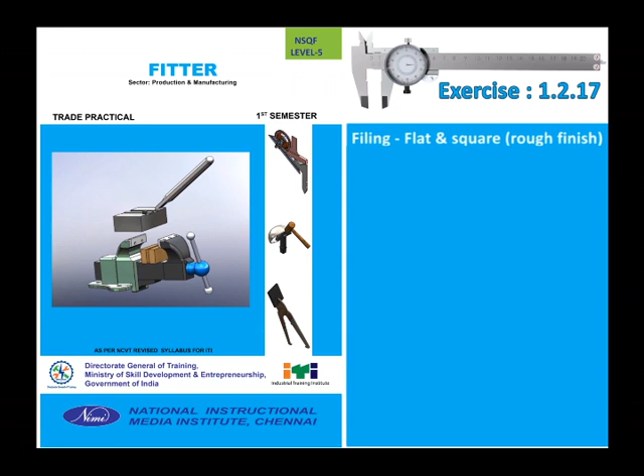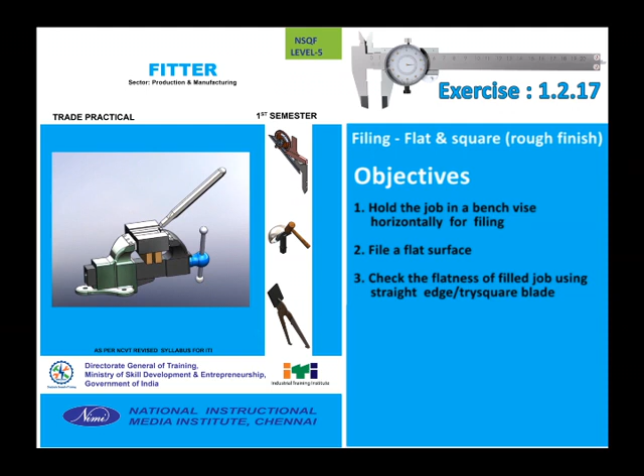1.2.17 Filing flat and square rough finish. Objectives: hold the job in a bench vise horizontally for filing, file a flat surface, and check the flatness of the filed job using a straight edge or tri-square blade.

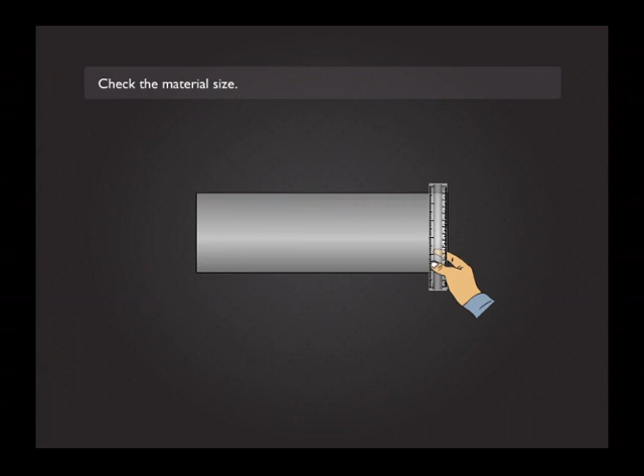Job sequence: check the material size and fix the job securely in the vise. Select a bastard file for rough filing and a second cut file for finish filing.

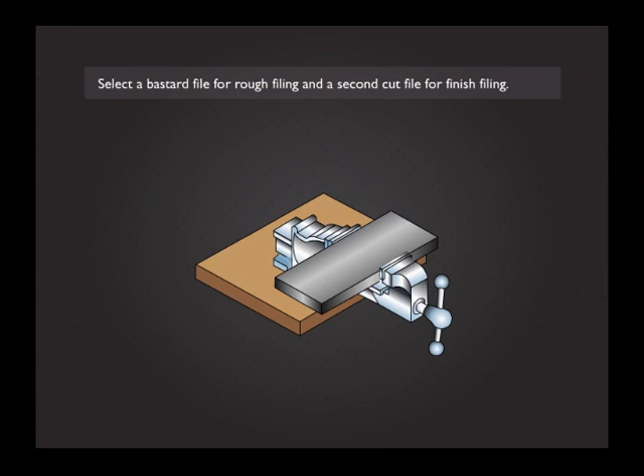File all four side faces, 1, 2, 3 and 4, to remove burrs and any visible waviness.

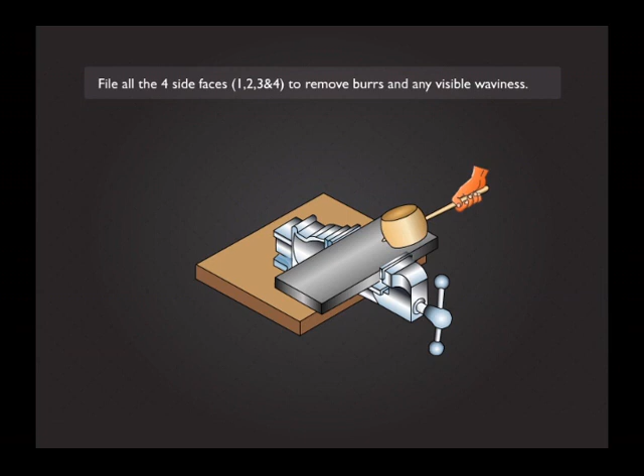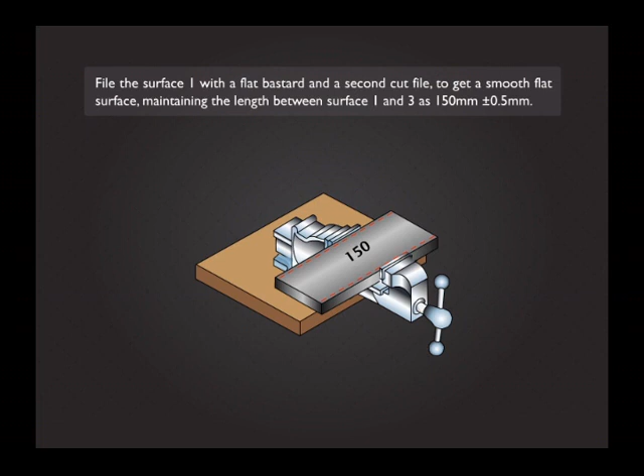File surface 1 with a flat bastard and a second cut file to get a smooth, flat surface, maintaining the length between surface 1 and 3 as 150 mm plus or minus 0.5 mm. Check the flatness with the blade of a tri-square.

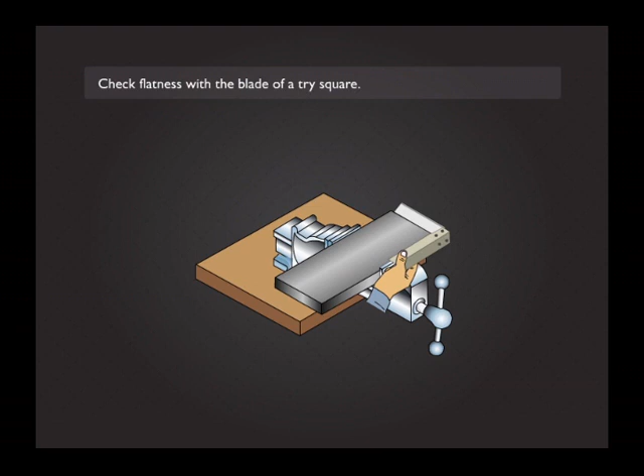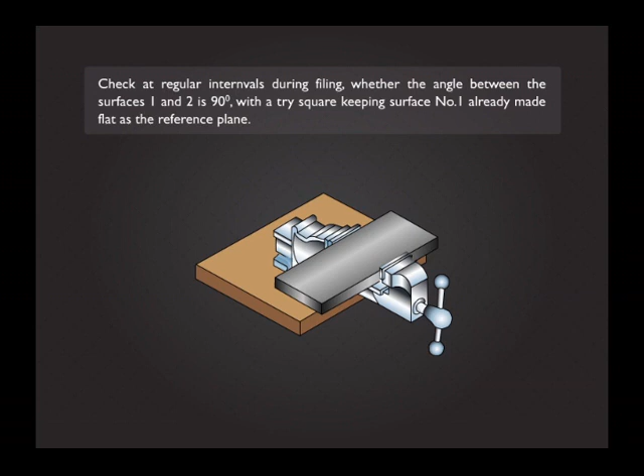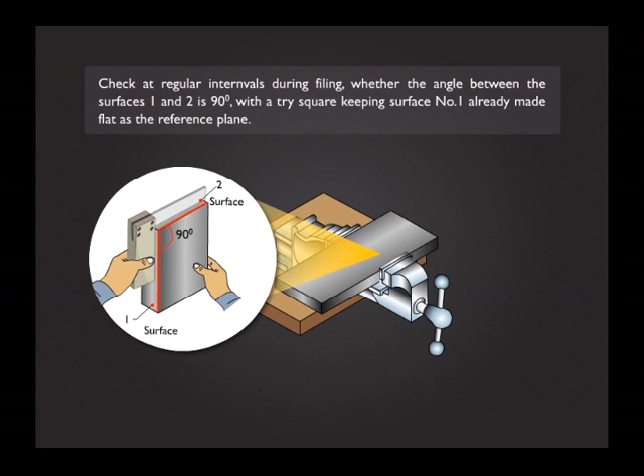File surface 2 with a bastard file and a second cut file. Check at regular intervals during filing whether the angle between surfaces 1 and 2 is 90 degrees, using a tri-square with surface 1, already made flat, as the reference plane.

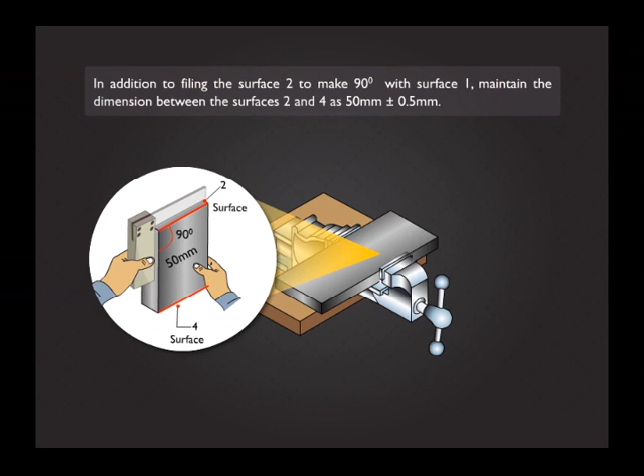In addition to filing surface 2 to make 90 degrees with surface 1, maintain the dimension between surfaces 2 and 4 as 50 mm plus or minus 0.5 mm. Make a final check for the dimensions using a steel rule and for the 90-degree angle between surfaces 1 and 2.

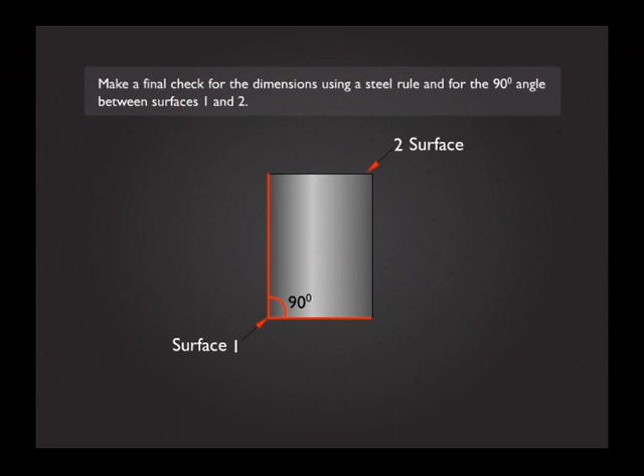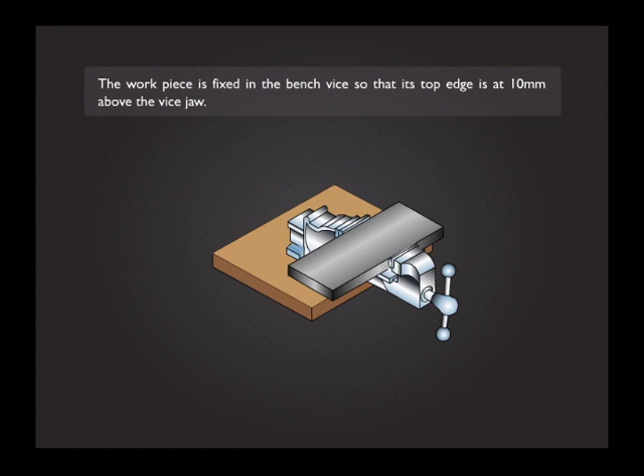Skill sequence: the workpiece is fixed in the bench vise so that its top edge is 10 mm above the vise jaw. Remove the burrs on the edges of the job to avoid injury to your hand.

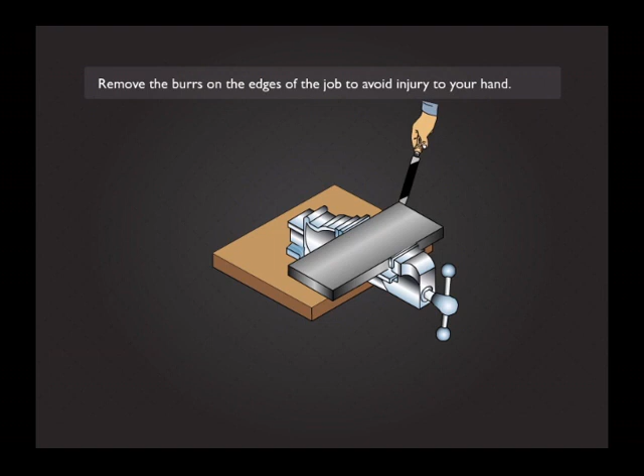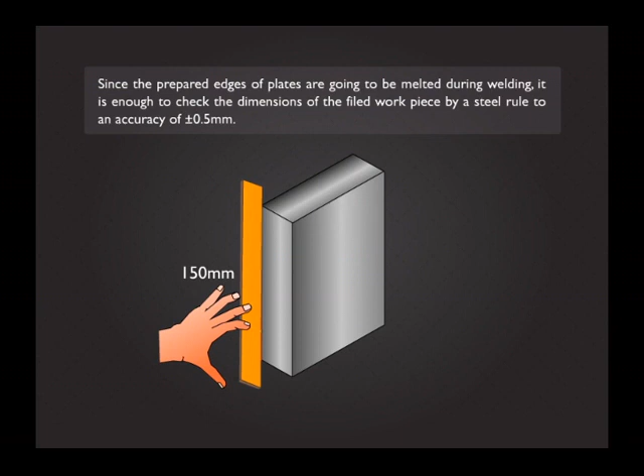Since the prepared edges of the plates are going to be melted during welding, it is enough to check the dimensions of the filed workpiece with a steel rule to an accuracy of plus or minus 0.5 mm.

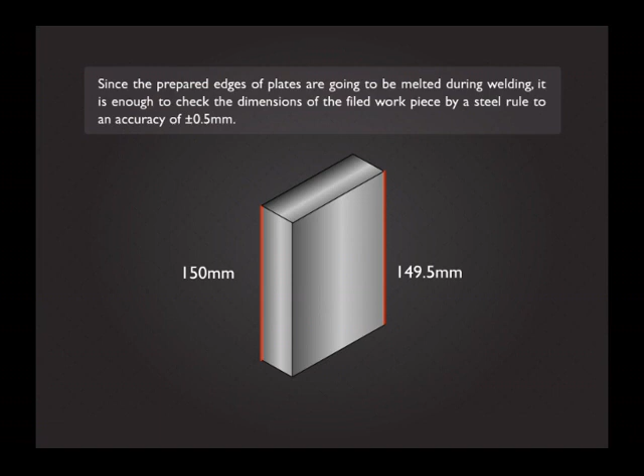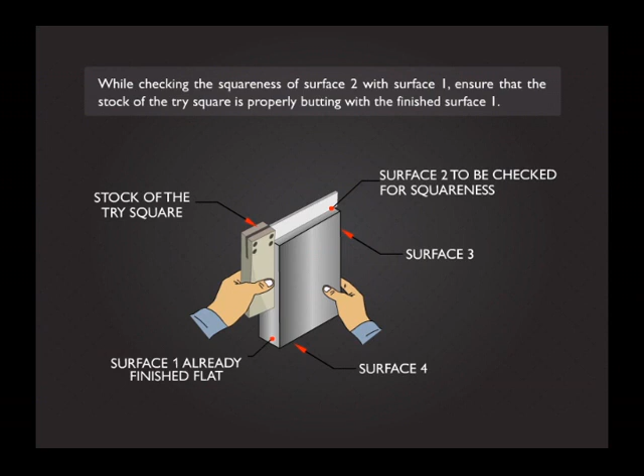While checking the squareness of surface 2 with surface 1, ensure that the stock of the try square is properly butting with the finished surface 1.

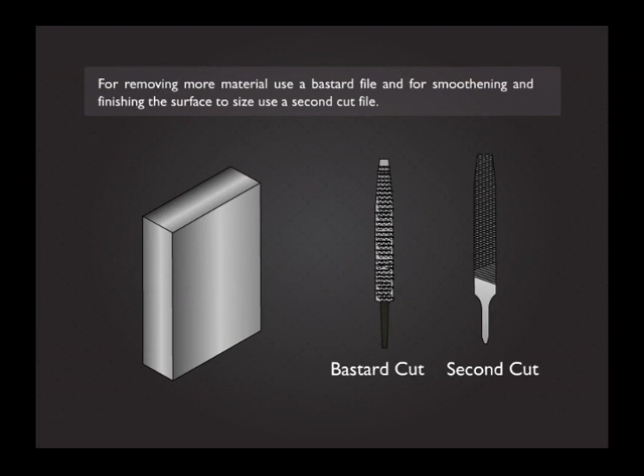For removing more material, use a bastard file, and for smoothing and finishing the surface to size, use a second cut file. Avoid rocking of the file, which will produce a slightly convex surface instead of a flat surface.